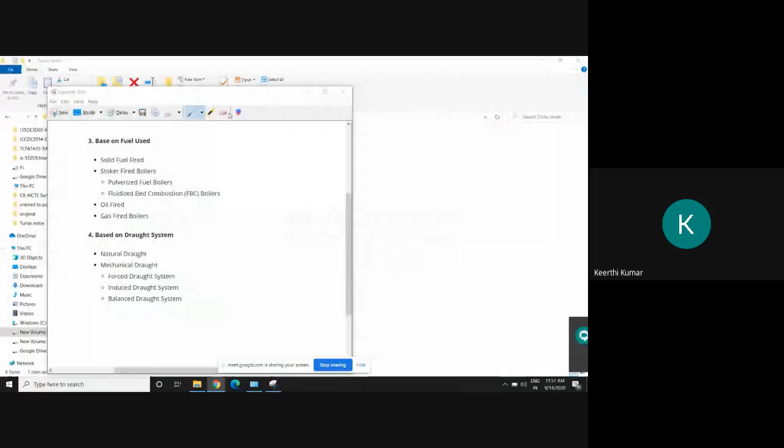Can I see the screen? Yes, sir. I'm going to present the PPT now. Okay.

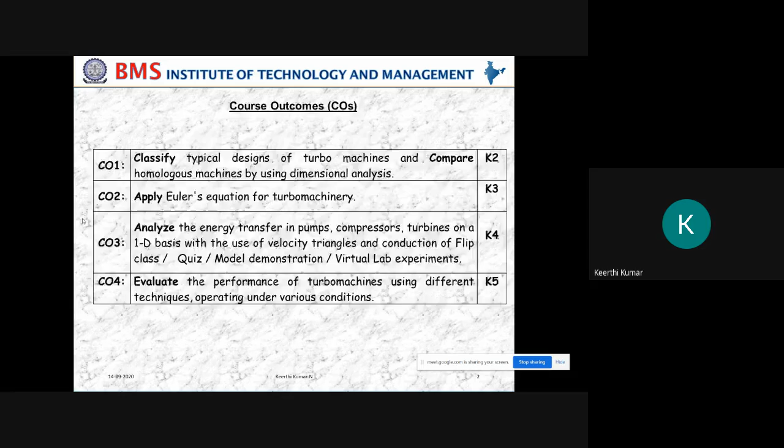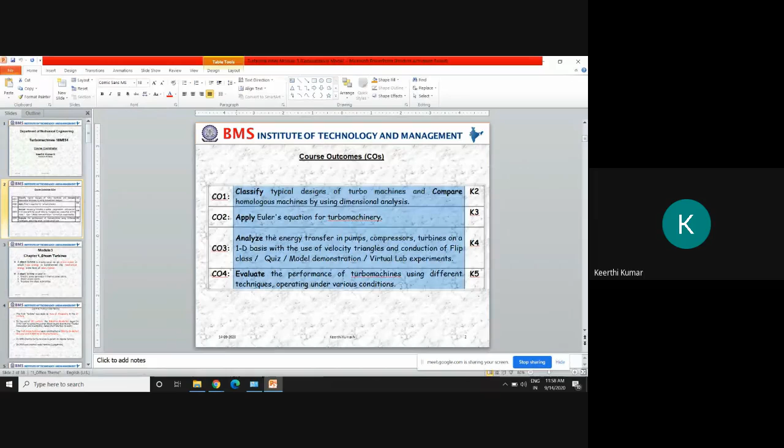Okay, this is the course outcome for the subject that I have taken. You can take this later, course outcome. And this was already discussed in the first chapter PPT only. You can go through this. Then this is module 3, chapter 1.

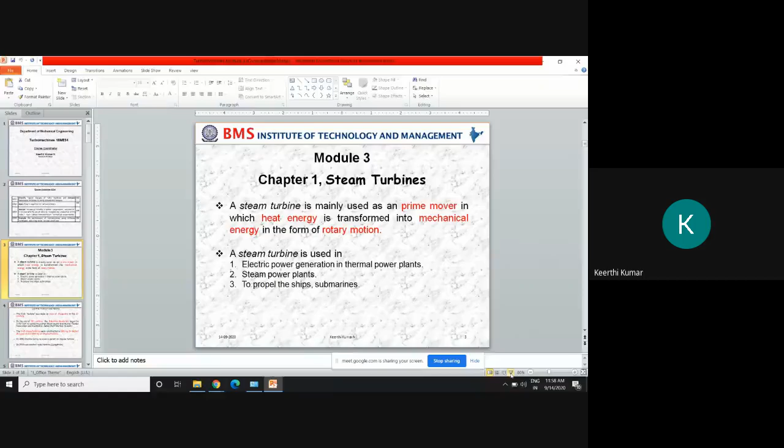Okay, in module 3, chapter 1, we are going to study about the turbines. The actual syllabus starts from here. But till now, whatever we have covered is just basics, very very basics of the turbo machine subject, as well as an upgraded version of the fluid mechanics chapter, fluid mechanics subject.

In fluid mechanics, you have studied about model study, dimensional analysis, geometric similarity, and then how to solve problems by using that dimensional analysis and all. You have already studied that. Further topics are covered in the first chapter, that is the problems on model studies and all, we have covered.

So today what I'm going to do is we are going to enter the next module, that is steam turbine, where actually turbo machine comes into picture. But before going for that, introduction to turbines, all those things, is mandatory, which we have covered in the first module. In the steam turbine, what do you mean by the steam turbine?

Any definitions by anyone of you? What have you understood by the steam turbine? If I tell about the steam turbine, what triggers in your mind?

These are turbines which use steam as their working fluid. There are few turbines where the working fluid is steam, and there are few machines which generate electricity. For generating electricity, there should be a turbine, and for rotating the turbine, there should be some fluid. We are using steam. If I use steam to rotate the turbine and then generate electricity, from the beginning, from steam to power generation, the entire plant is called a steam turbine.

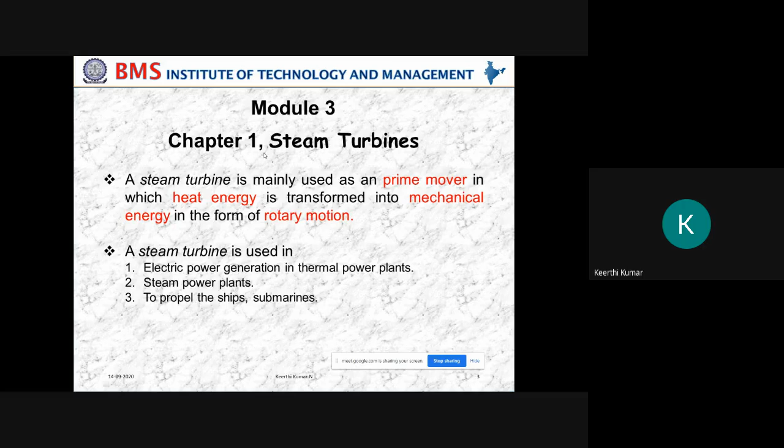Next, some history facts about the steam turbine. This is all history, not required for exam purpose, but you should know, being a mechanical engineer, when steam turbines were generated, when they were introduced, and all those things.

The first turbine was made by Hero of Alexandria in the 2nd century. At the end of the 18th century, the Industrial Revolution begins, and as part of that, James Watt started working on steam engines. The first steam turbine was constructed in 1883. Remember the dates and names, because I may ask questions in a quiz. The first steam turbine was constructed in 1883 by De Laval, and it was carried forward in 1884 by Charles Parsons.

So by their names only, they have introduced a turbine: one is the De Laval turbine, and the other is the Parsons turbine, introduced in 1883 and 1884 respectively. They were invented long back and were working from that year. In 1896, Charles Curtis received a patent on the impulse turbine. There are three inventors: De Laval, Charles Parsons, and Charles Curtis. These three persons have contributed a lot to the steam turbine.

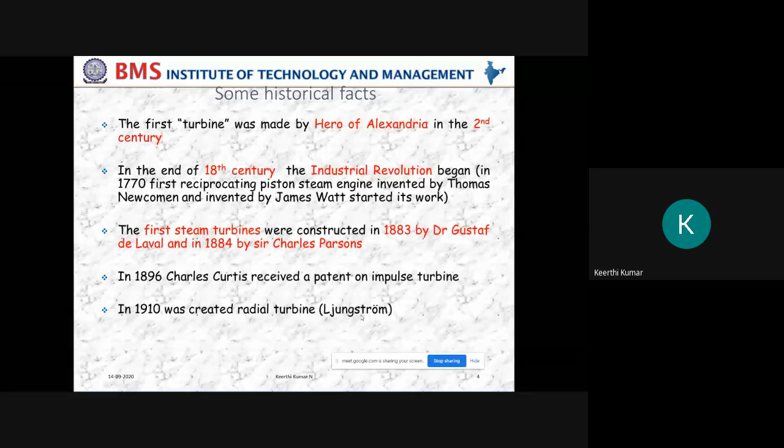We are generally, while solving the problem, going to study three types of turbines: De Laval turbine, Parsons turbine, and Curtis turbine. They are given their own names for the turbines. And in 1910 a radial turbine was created. These are all a few points about the history of steam turbines.

Then, to produce steam, what is the major source? You already studied this in first year. How is the steam produced? With the help of a boiler, correct. So the water is fed into the boiler, and by the addition of heat, the water is converted to steam.

A boiler is a steam generator, a device used to create steam by applying heat energy to water. It can be said that older steam generators were commonly termed boilers and worked at low and medium pressures, around 7 to 2000 kilopascal or 1 to 290 psi.

But nowadays, steam turbines operate at very, very high pressure, much greater than 2000 kPa. We'll come to know how much pressure is operating while solving the problems. Very, very high pressure for nowadays turbines, but earlier they used to operate only with low and medium pressure.

Earlier, safety was a concern. Now, because of improvement in technology, we can control whatever may be the pressure of the steam, and the damages may be controlled. Because of that, nowadays we operate at higher pressure and electricity is also generated at higher rates.

This is very important: at pressures above this, it is more usual to speak of a steam generator. Nowadays, if it is more than 2000, only then we'll call it a steam generator. Below this, we are not at all using it for steam generating. Earlier, that was the major source, but now, more than this only, we will talk about steam generators.

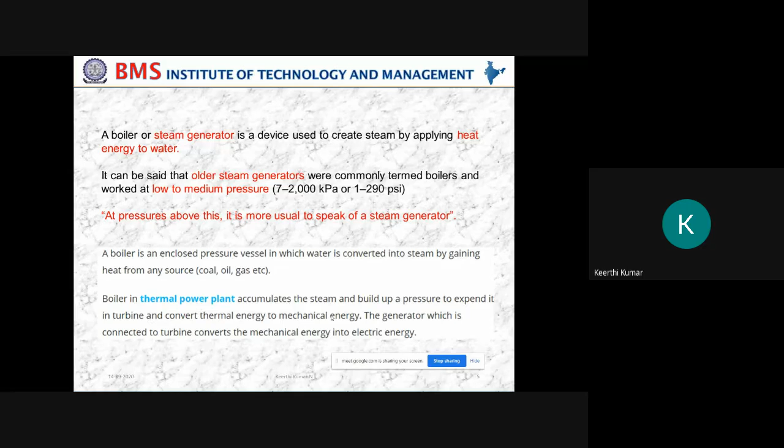There are huge boilers. With the help of a boiler, steam is generated, and that steam is taken out to the turbines. Once the steam is ejected onto the turbine, it starts rotating and converts to mechanical energy. In turn, that mechanical energy is converted to electrical energy with the help of a generator attached behind the turbine.

There is a coal bunker where coal is fed into the bunker, in a lumped form. That is not fed directly to the boiler because it may reduce efficiency. So the lumped coal is sent to the pulverizing mill, where it is hammered and converted into pulverized, powdered form. That powdered coal is then fed into the boiler.

For burning, coal alone is okay, but you have supplied the coal here in pulverized form, and there should be air too. The air or oxygen is supplied with the help of a fan, and it is compressed. High pressure air is supplied to the furnace. Because of this air or oxygen, and because of this pulverized coal, combustion takes place.

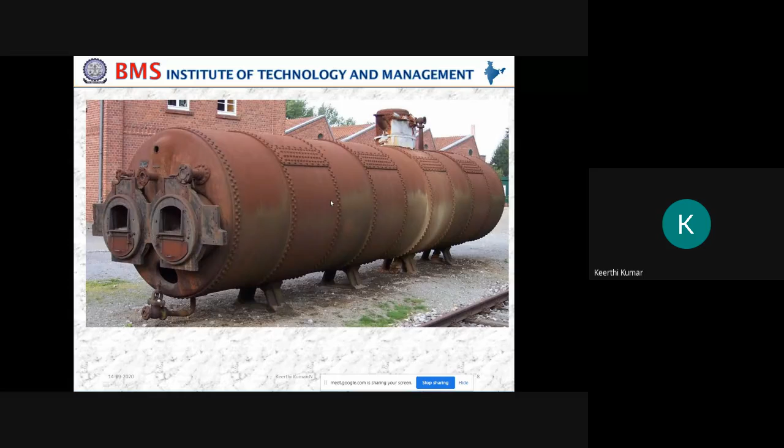This steam boiler I have shown, this circle is the diameter. This is only the boiler which is fixed in the steam turbine plant. So just imagine what will be the size of the furnace compared to the boiler, it is very, very huge. The furnace height will go up to the 4th or 5th floor of the building from the ground. If I want to see what is happening from the top, I have to climb 5 floors. That will be the size of the furnace. We will show you if you go for the visit.

And these are all the types of boilers. One is fire tube boiler and water tube boiler. Based on the operating pressure, that is again classified as ultra supercritical boiler. The pressure range is from 27 megapascal, rated up to 590 degrees centigrade for the boiler. Always for a boiler, if I ask you to specify the specification of a boiler or steam plant, we are going to specify either in terms of pressure or temperature. Remember, if I ask you to specify the specification of a lathe, we specify the length, swing diameter, length of the bed, like that. Here, for the boiler, we are not going to measure the diameter or height of the boiler. We are going to tell in terms of pressure and temperature holding capacity.

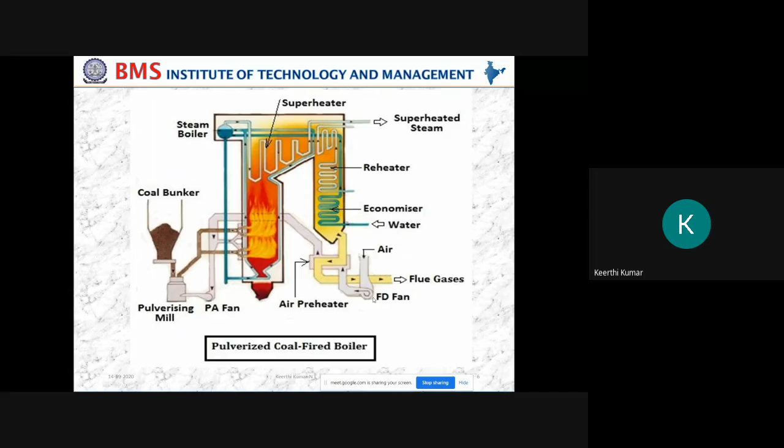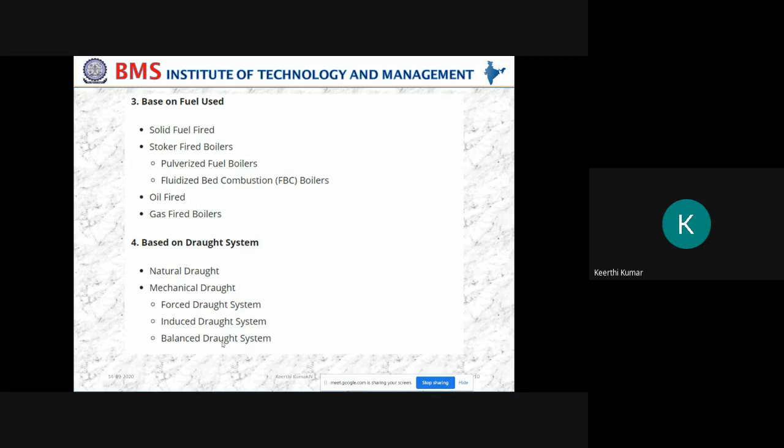And based on the draught system: natural draught, mechanical draught, forced, induced, balanced draught. This means how we are going to supply the air. See, here I have shown, the air is supplied here. This is called the FD fan, that means forced draft fan. With the help of a blower, we are going to supply the compressed air. This is the FD fan, forced draught system. Like that, ID fan will be there, balanced draught fan system and all. So based on that also, we are going to classify.

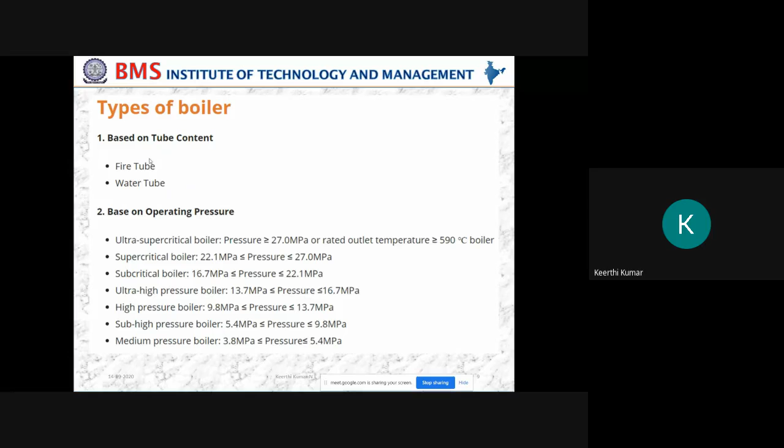So after that, the very important thing is these two: fire tube boiler and water tube boiler, because all these operating pressures you can obtain in either of these two. But now I'll concentrate more on fire tube and water tube boiler. So can anybody remember what you mean by fire tube and water tube boiler?

In fire tube, the water is around, the water is applied. No, I mean the steam is generated inside the pipe, and outside in the surrounding there's water. And in water tube, water is applied in the pipes and the fuel is burnt in the surrounding.

Yes, almost it is, you're near to the exact answer, but you can further define what exactly it is. You already studied the figure of fire tube and water tube boiler in EME, right? So I'll just refresh those things and then go for the actual syllabus of turbo machines. What do you mean by water tube boiler? A water tube boiler is such kind of boiler where water is heated inside the tubes and hot gases surround them. The best example of a water tube boiler is your gas geyser at home. So what is the function of a gas geyser?

We will allow water to flow through a tube and surround the tube. We supply gas and burn it. Because of the hotness produced by burning, that heat will be taken by the tubes. Inside the tube there will be water supply, so that water will be heated up and we take out the hot water. That is the best example of water tube boilers, where water is inside and outside we burn. Burning may be by using any source - fuel, coal, kerosene, or gas, whatever the source of burning. But whatever water we supply inside the tube should get heated up. That is the concept of water tube boilers.

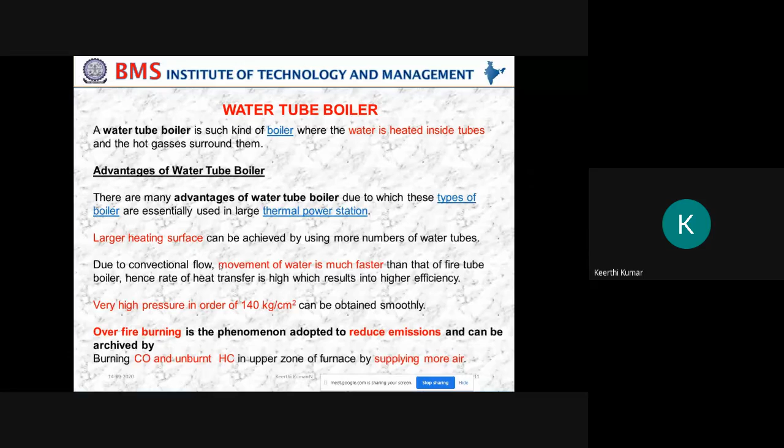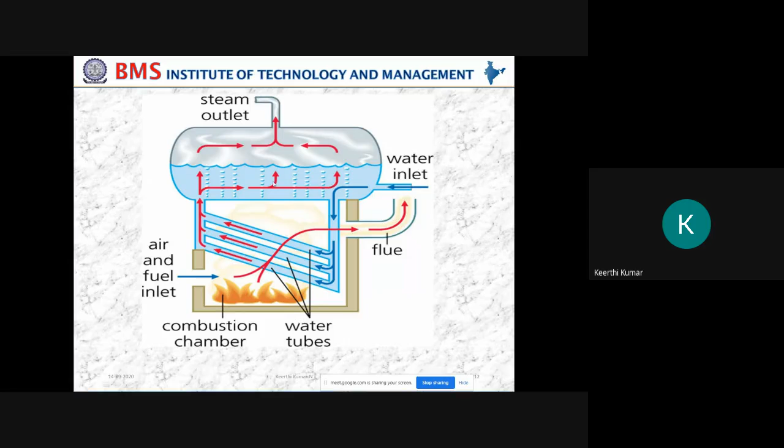If you go by quantity, this is good. If you go by pressure and temperature, this is good, because higher pressure and higher temperature can be achieved with the help of water tube boilers. So water tube boilers are always preferred compared to fire tube boilers, but fire tube boilers also have some applications where they are used.

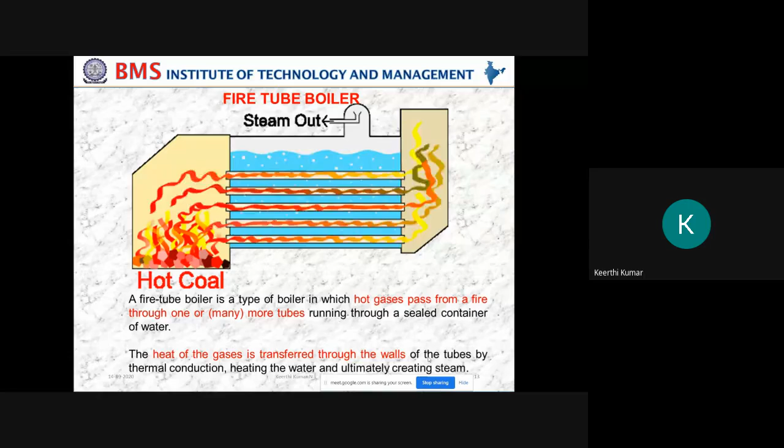We'll see further. A fire tube boiler is a boiler in which hot gases pass in the form of fire through one or more tubes, and the heat of the gases is transferred through the walls of the tubes by thermal conduction. Heating of the water ultimately creates steam.

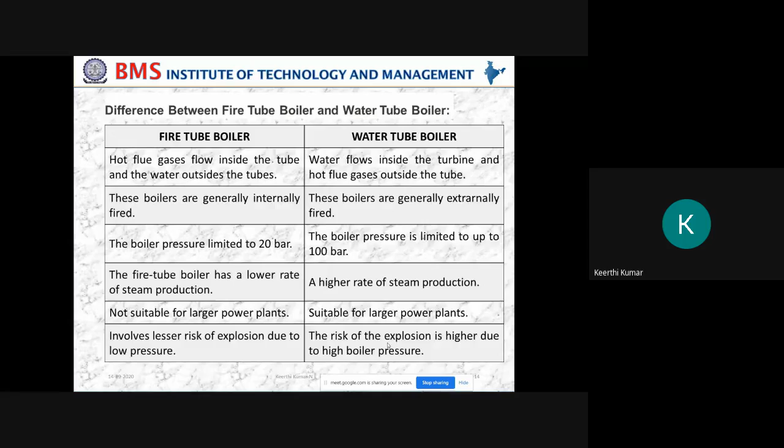These are all non-technical differences, but you should know them. Fire tube boilers require less skill to operate, while water tube boilers require higher skill. Fire tube boilers are difficult to repair and clean because the complete thing is packed, whereas water tube boilers can easily be repaired. Fire tube boilers require a large shell diameter, while water tube boilers have a lesser shell diameter. The efficiency of the fire tube boiler is less compared to the water tube boiler.

This is a very important technical term: efficiency of the fire tube boiler is less, while efficiency of the water tube boiler is more because it can operate under higher pressure and produce high pressure steam. It can also operate at higher temperature. The maintenance of the water tube boiler is costly, while for fire tube boilers it is less. Some dimensions are also given.

There are examples of fire tube boilers, such as the Lancashire boiler which you have studied, and under water tube boilers you have studied the Babcock and Wilcox boiler. There are many other types of boilers. The Cornish boiler is an example of a fire tube boiler, having a length of 5 to 7.5 meters and 12 meter diameter. Just imagine 12 meters in diameter. So what will be the diameter size of this boiler?

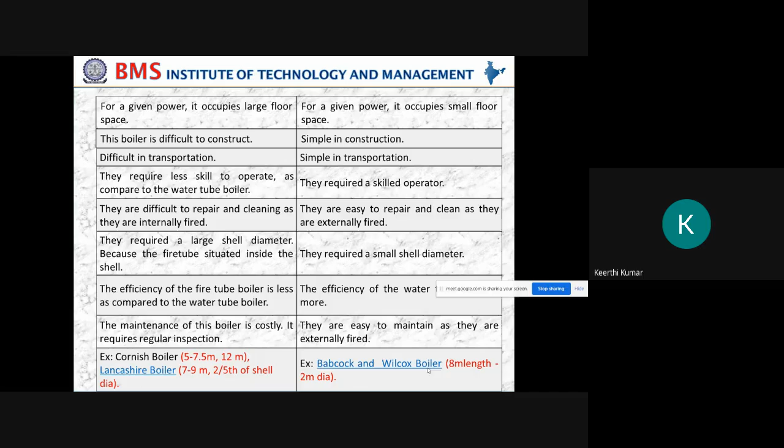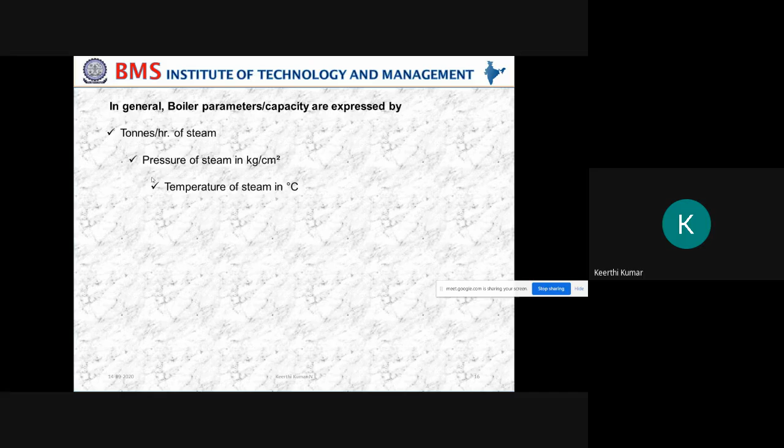In general, boiler parameters or capacity are expressed in terms of tons per hour of steam, pressure of the steam in kg per centimeter square, and temperature of the steam in degree centigrade. Generally, the latter two terms are very important, where boiler capacity or parameters are expressed. Sometimes we include the quantity also, meaning tons of steam produced per hour. So these are the three important parameters or specifications of a boiler. We are not going to specify in terms of length, diameter, width, thickness and so on. We specify in terms of any one of these three: temperature of the boiler, pressure of the boiler, or tons per hour of the steam.

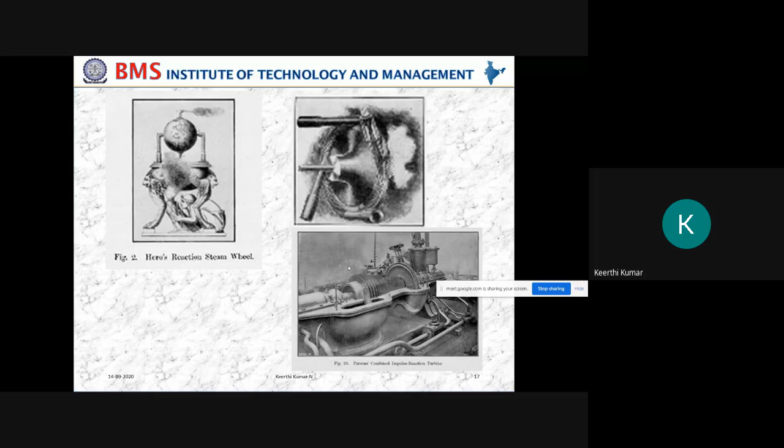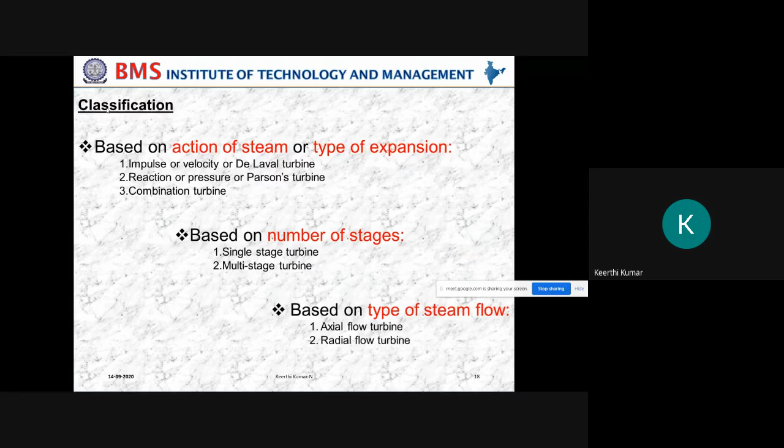From here, they are going to ask for the example—classification of the steam turbine. Till now, whatever I covered, they are all for general understanding purpose before entering the chapter or subject. But from the exam point of view, we'll start from here: classification of steam turbines. This is the first heading in the syllabus, so in the next class I will take up this classification and move further.

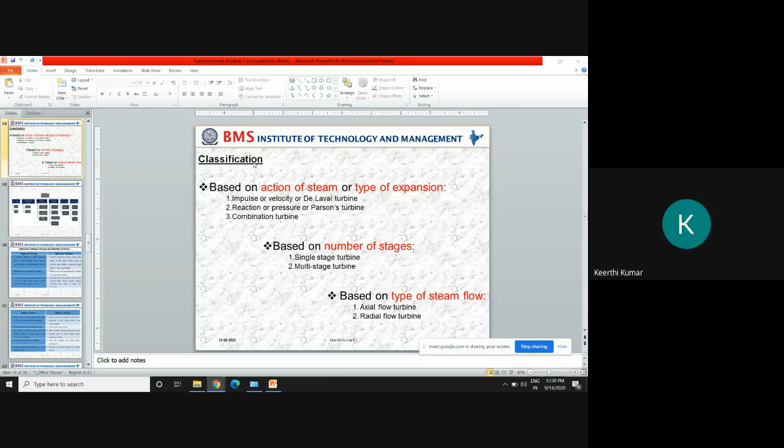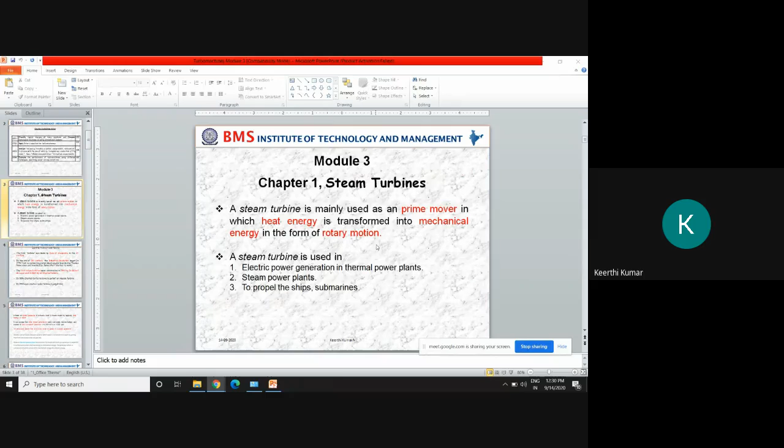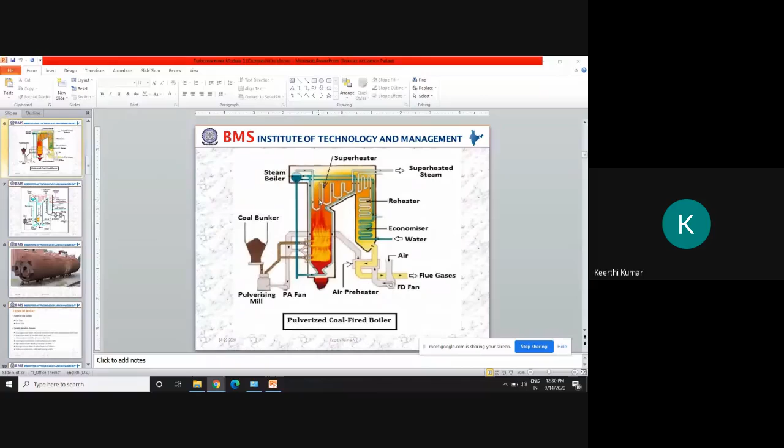For today's class, I just did an introduction of the steam turbine. Let me go fast and tell you what all things were covered: definition of steam turbines, applications of steam turbines and where it is installed, and some history about the steam turbine. Also what a boiler is, and how the furnace and boiler are arranged in a steam plant. This is the line diagram of the same thing I showed earlier as a figure.

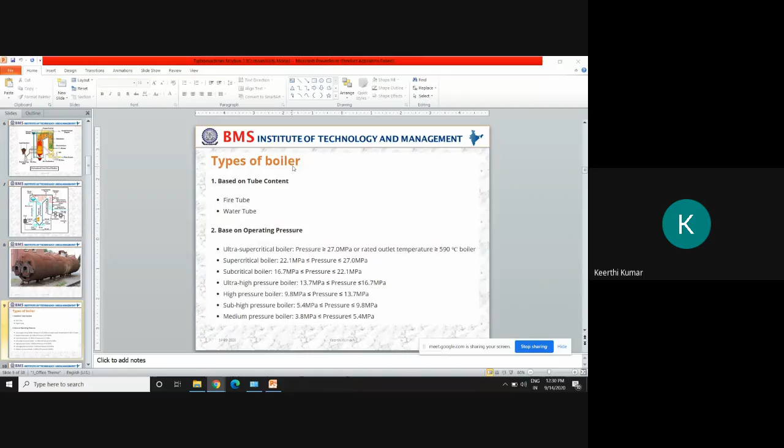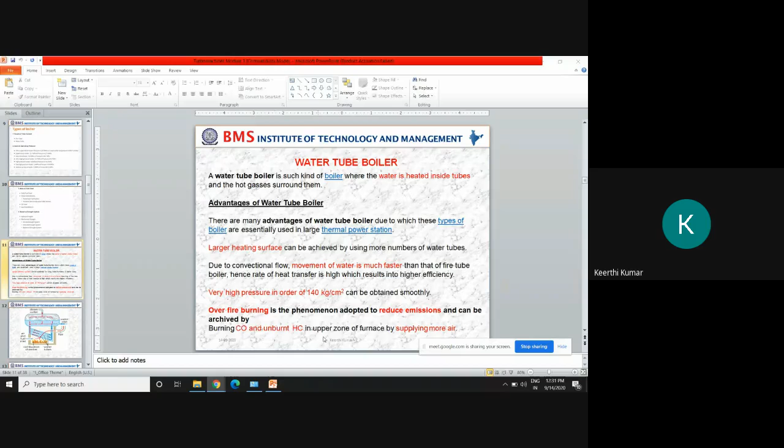This is the original picture of the boiler and the classification of the boiler—based on tube type, based on operating pressures. Under that there are so many classifications based on fuel used, based on draft system. And what do you mean by water tube boiler—its definition, advantages, and what is used to reduce emissions. These are all things we have studied.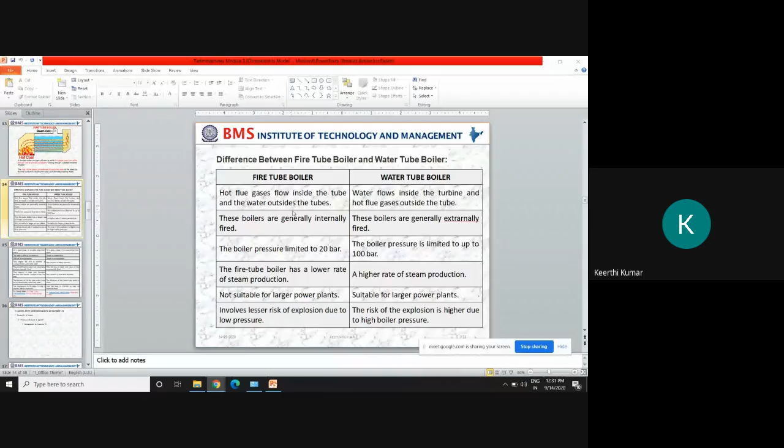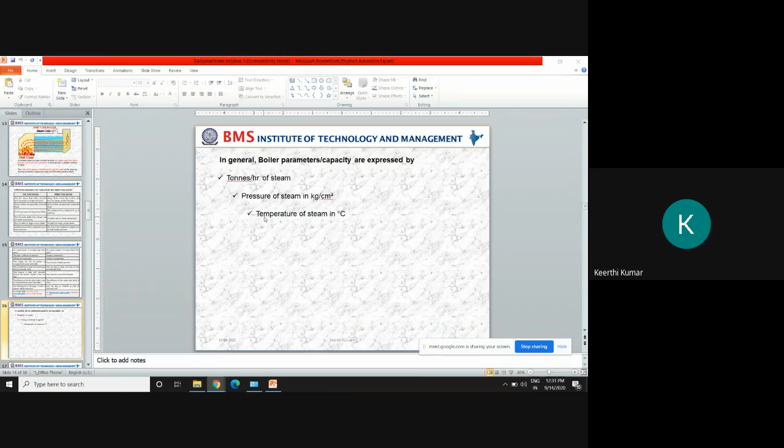Then how we are going to define any boiler—any boiler can be defined in terms of three points: pressure, temperature, and tons per hour of steam. Out of these three, the last two are very important—pressure and temperature. Then these are all original pictures of steam turbines which were invented in the year 1883. That is the original steam turbine; these were used earlier. So till here I covered in today's class.

Anybody having doubts in any of the points till now, till here, whatever part I covered? Anybody having doubts?

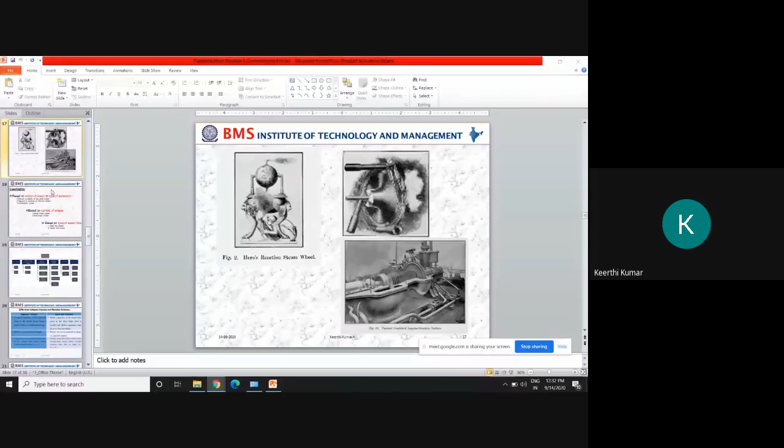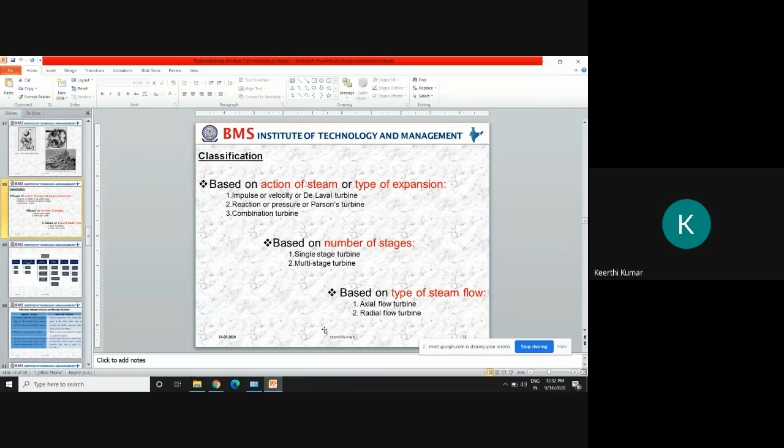In the next class onwards, I will go as per the syllabus, from here—that is, classification of the steam turbine. These are all there in the syllabus. But the history I have shown right now is not there. Being a mechanical engineer, though, you should know all these things, so I covered this.

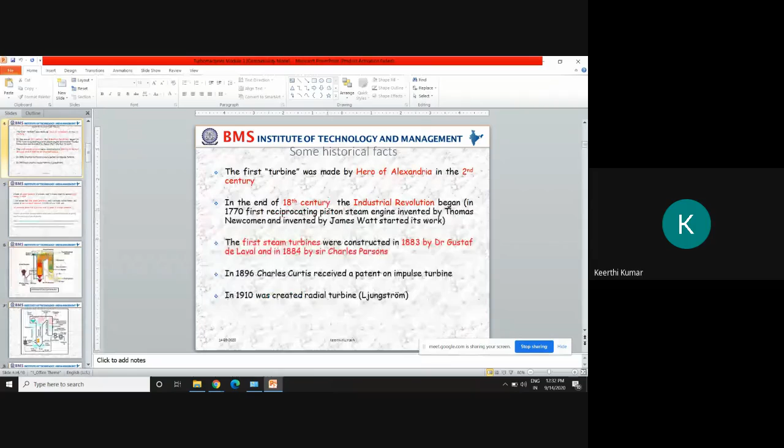No sir, no doubt. Just covered the introduction and refreshed the topic of EME, whatever you have studied in Elements of Mechanical Engineering. I refreshed that, and then covered the basics, and then history, and then figures, dimensions—all those things. I think probably you're refreshed now.

Further, what I'm going to do is take up problems, derivation, or theory after the steam generation—after the steam generation, how we are going to use the steam. That is important for us. After producing the steam in the furnace or boiler, how we are going to use that for rotating the turbine—that is important for us. But before going for that, some history or background was required, so I covered this. Based on this only, I prepared a quiz.